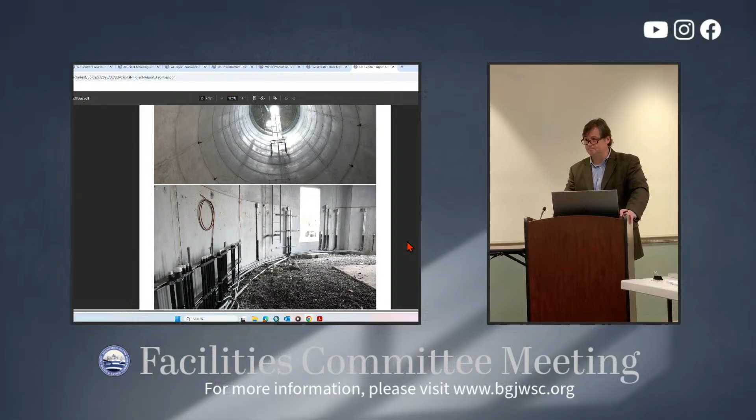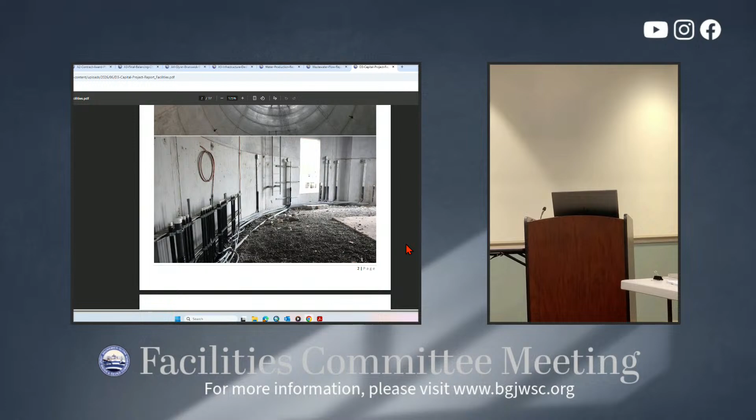Interior, we don't have a concrete slab the whole way in there? We will, yes, sir. Right now they've got their conduits, chases, and everything all plumbed out here. That's all ready to go. They will form a slab in the very bottom of this right here, so it'll be nice and finished when it's done.

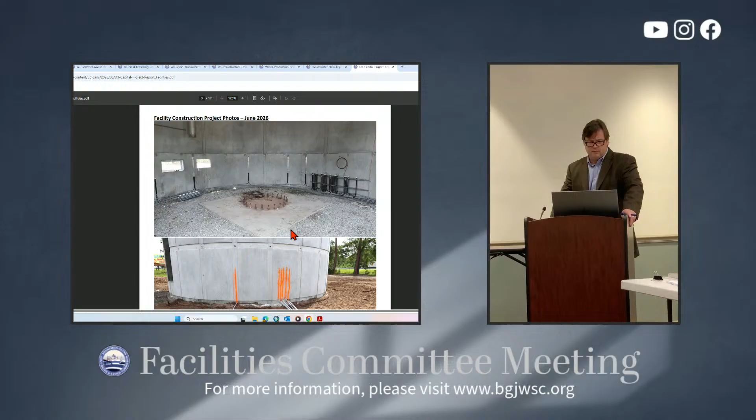You can see from that shot there - conduits, and that's actually a good bit of fill. This will be filled flush with the entranceway and the threshold, and on the outside of the tank as well, it'll be tapered down around the site.

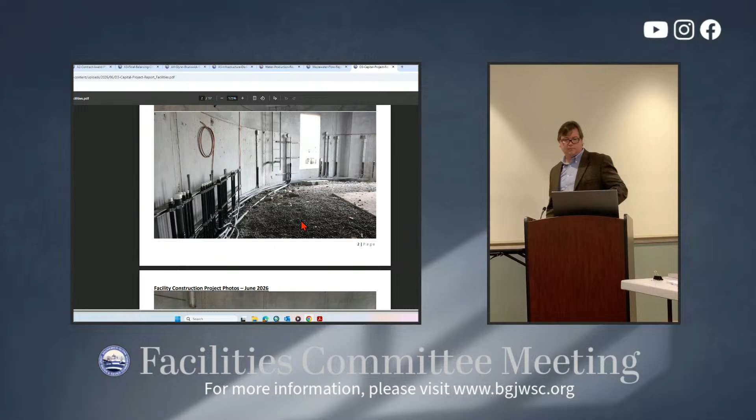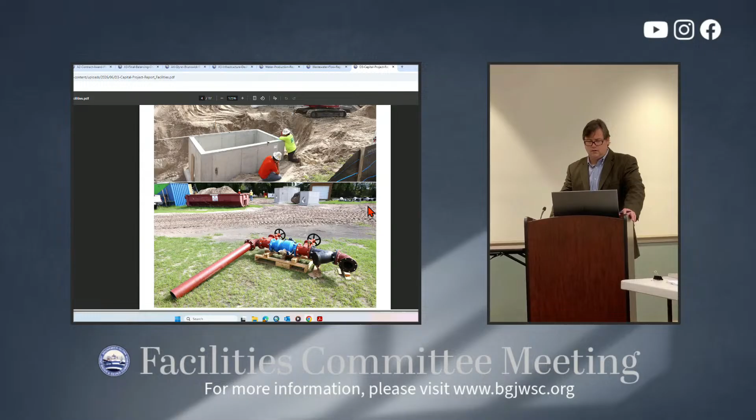Okay, next project is down at exit 29. Three-part project going on down there. The first, Division 1, is our water production facility or well site, but also the service pump house right there that sends the water out to our distribution system. And this is a vault going in here. Miscellaneous water main extension activity to tie in that new facility to the existing water system.

What's the vault for? That's our meter vault. Oh yeah, it's a meter vault.

So typically, water will come out - you can barely see it right here in the back corner, that's our well. We took an existing, pre-existing well, rehabbed it, modified the motor and such to the conditions that we need now. That well pumps over our ground storage tank over here. Then when the system calls for water to be pushed in, we pull water out of the ground storage tank, it comes in our high service pumps here, comes out here, goes through the flow meter, then on out to the system.

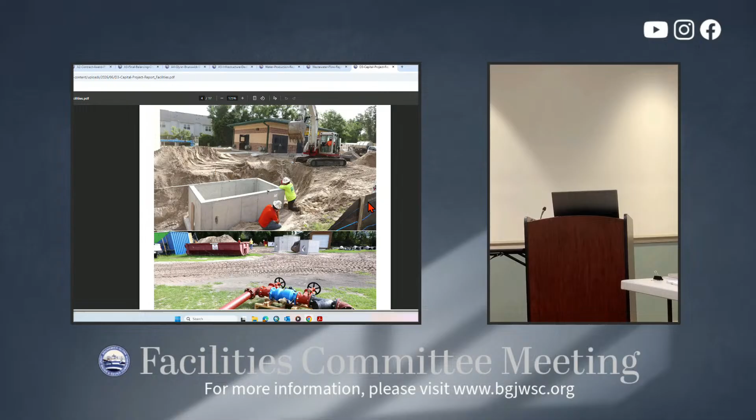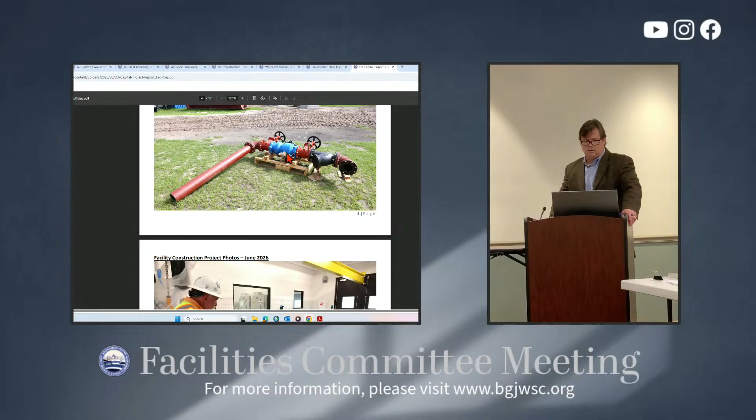There's our meter, what a typical meter looks like. When do you think we'll be turning this well on? Very soon, we're in the last throes of it - you can see the production facility is essentially complete. This is the last major item of the project, the water line tie-in, which they've been working on this week. Tie-in's supposed to be Thursday. Yeah, I'm supposed to finish that Thursday. I would say within a month we should be seeing water being pumped out into the system. Final closeout probably by the end of July.

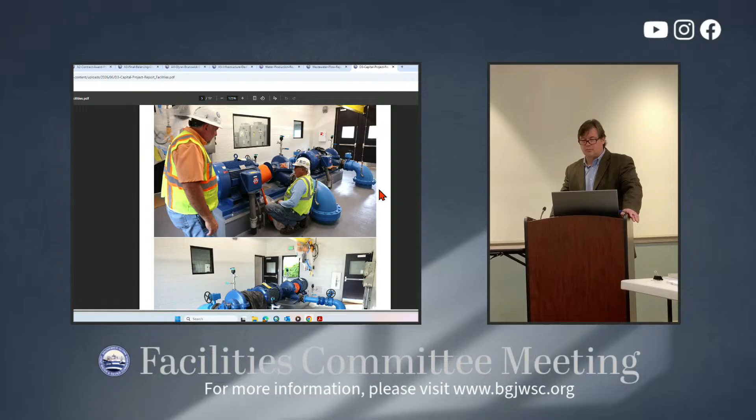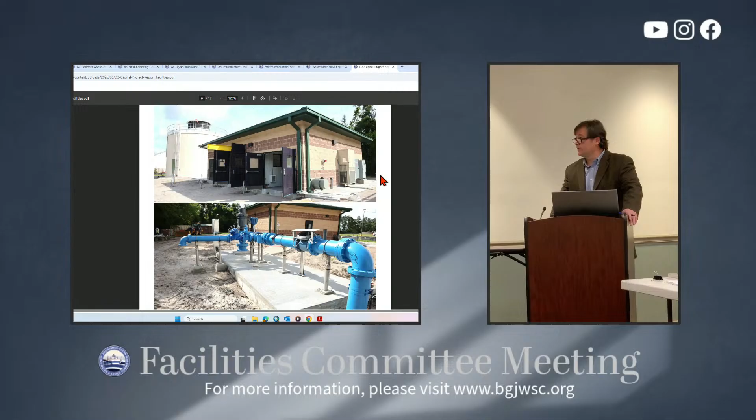Contractor's Petticoat Schmidt. Outside view of the facility is very nice, and it complements the existing exit 29 water pollution control facility down there.

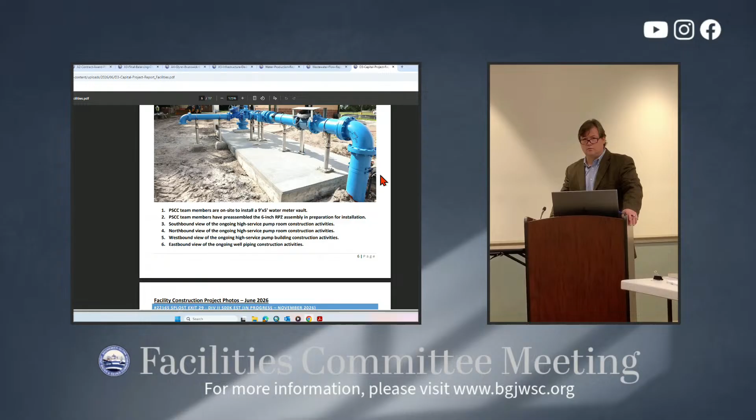Was anybody there when they raised the tank? At the treatment facility? Yeah. I'm sure we had staff there, it was during - two operators, yes sir. Video it? We do have a time-lapse video of it, yes sir, we can pull that up.

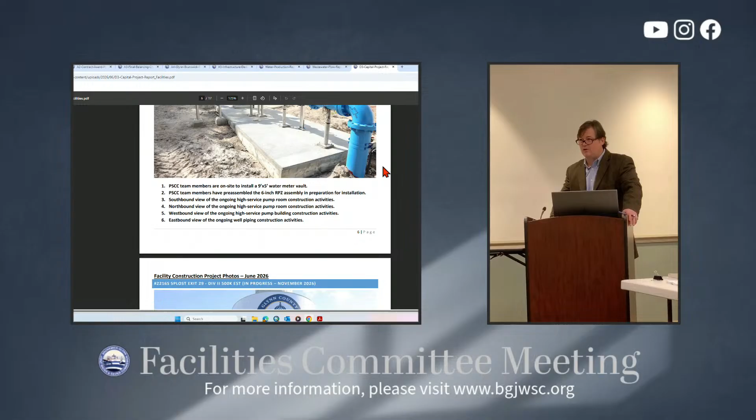Yeah, we raised that tank according to the video in about 8 seconds. Did it show how they raise it? Yeah, I think we can probably pause it and slow it down. We can talk about that, no problem.

So speaking of that, here is Division 2, our elevated storage tank down at exit 29, just south of the treatment plant on the commission's property. We had a very nice event down there. Glynn County staff and leadership attended as well, you can see them standing there.

As we talked about before, on these types of tanks they'll construct the concrete column first, and then build the steel tank, the bowl, around the base of it. They do that because it's easier to work closer to the ground, and they actually get it pretty much 90% painted.

Right now there's no top on the tank because it's threaded over the column, so it's like a big glass, or wine glass if you will. As it goes up, they'll raise that thing with hydraulics and cables, and raise it up into place. As soon as they get it to the very top, they weld it in place and seal weld everything, then build the top over the steel top.

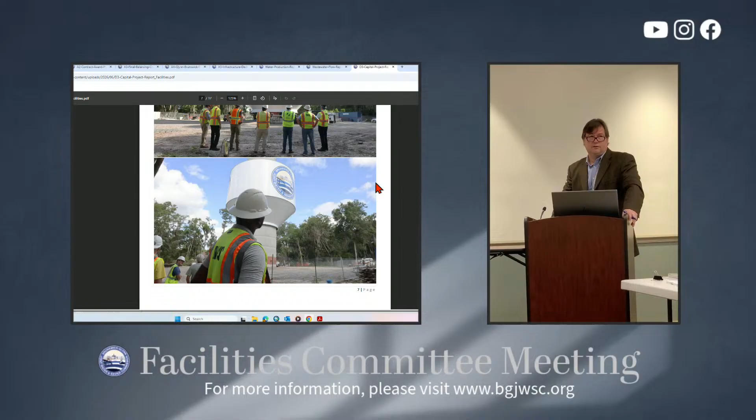They started a little after 8 o'clock, and by about 10:30 they had the thing in place. You can see it's moving about halfway up right there, and you can't really see the cables from this view.

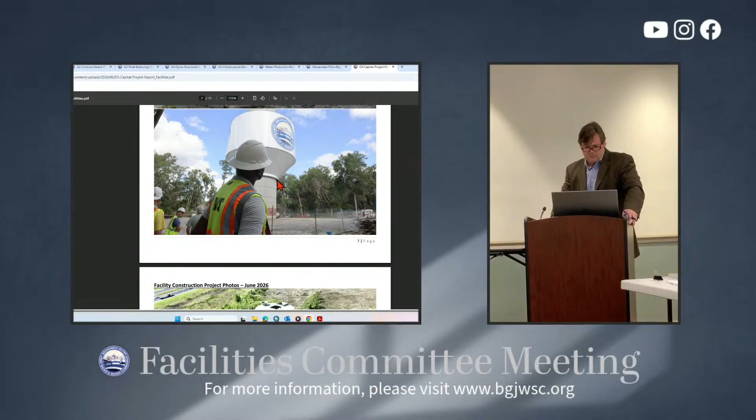But you can see right here, this kind of showcases it, all around they've got hydraulic cylinders, and cables suspended down, latched onto the bottom end of this bowl. It's all hydraulic rams, all coordinated. They raise them a little at a time, all the way around, to keep that thing level as it goes up. When they get to the extent of the hydraulic ram, they lock the cable down, lower the ram again, grab another bite, and pull it up some more. They do that multiple times, and raise that tank up to its top elevation.

There we go. Nobody's up there when they're doing that, or is it? Yes sir, their crew, crew members for them. I don't see anybody in that picture. They've got crew on top.

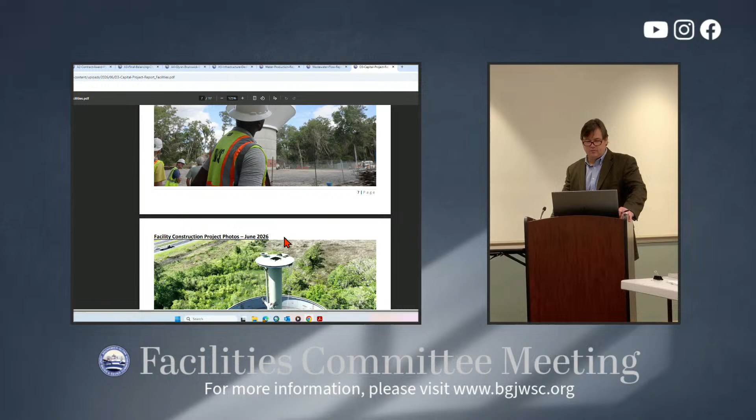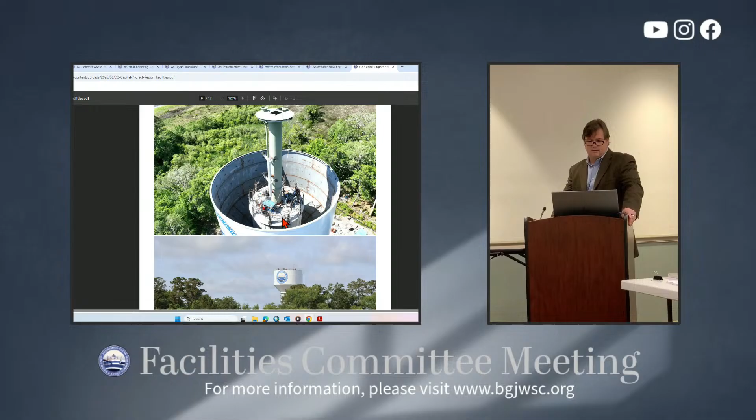And when are they gonna paint the inside? Inside's going on right now, matter of fact. So now they've got the bowl, or the tea glass or whatever you want to call it, already up in place, and now they start welding the top on.

You can see in these pictures here the corral they've got, and actually the top. Top's all welded into place, you've got the corral up top, some guys up there working right now painting all that, getting the outside done, kind of like drying in a house. Once that's all done, they start working on the inside.

The top has a little bit of a dome. Just a little bit, yes sir. Yes sir. Keep rain shed off of it.

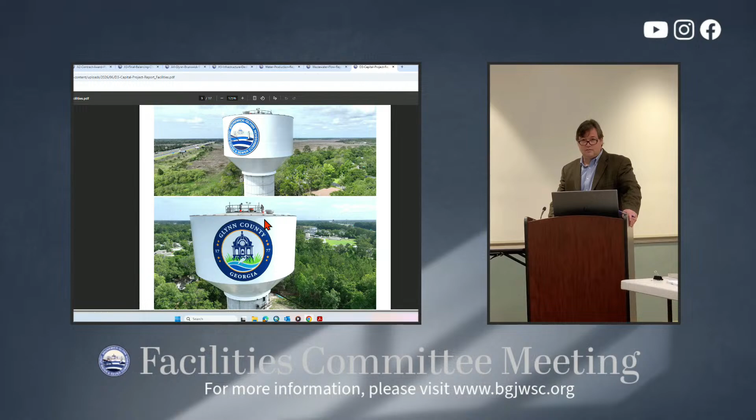Have you been up there? Not yet, they hadn't let us get up there yet. I'm not sure our workers' comp insurance wants them going in there, but we may get up there. May find a way, we may find a way.

Great view. All right, good deal.

Next project is Coffin Park pipe relocation. That is in progress, if you've driven by you've probably seen a lot of activity. That is a City of Brunswick project to rehabilitate the tidal ditch through there.

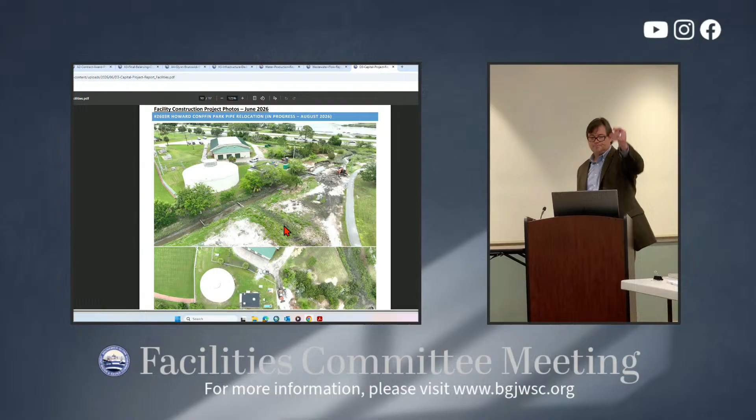It was a cooperative effort. You can see a couple pipe crossings that we have, and we teamed up with the city to work underneath their permit with the Department of Natural Resources to get those pipes basically under the ditch rather than having aerial crossings. Tidal action with salt water, the wet-dry cycle and all that is very hard on ductile iron casings, so it's better to get those underneath the ditch and out of the way. That way they also don't block up debris as it flows up and down the tidal ditch.

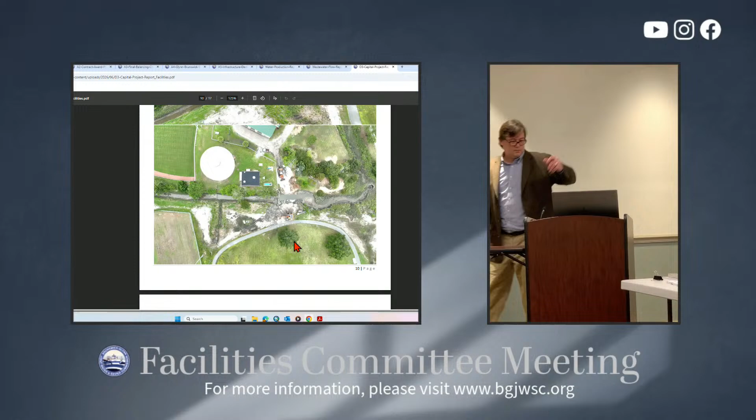Good aerial shot there, kind of a neat picture. It gives perspective, you can tell this one was dug, a straightened out ditch. Then you can see it kind of starts meandering here, gets a little more natural right here, crosses underneath 17 and on out to the marsh, or the ski basin, as some people used to call it, I think.

So they're straightening that out? No, sir, they're rehabilitating the walls. They're putting in an armor block, a concrete block tethered together with rope and whatnot, and they set that in there. The whole intent is to get it established with oysters and natural grasses that'll naturally establish and hold that bank steady. It's important to us because you can tell how close our facility is to the tidal ditch, and the corner of our fence is right here. There's been some overtime undermining and erosion that's happened, so that'll be fixed as part of the city's project, and that'll help protect our facility as well.

Is our production facility ever flooded? Yes. Now, that generator we installed out there is up in the air, so that shouldn't be a problem. Probably not the ideal location now for a facility like we have, slab on grade, but you can see this is essentially a salt pan. On super high tides, it does flood.

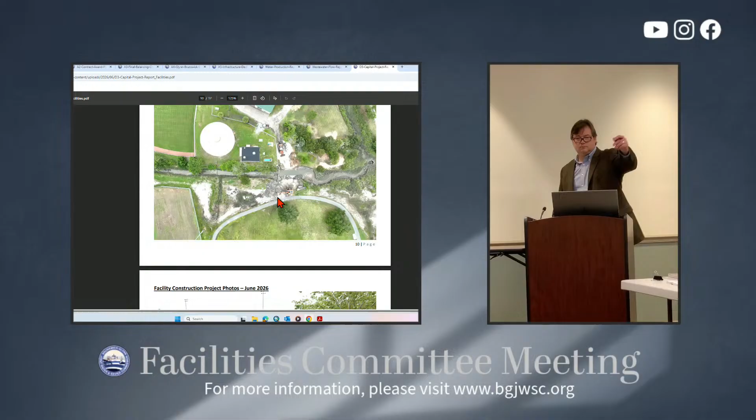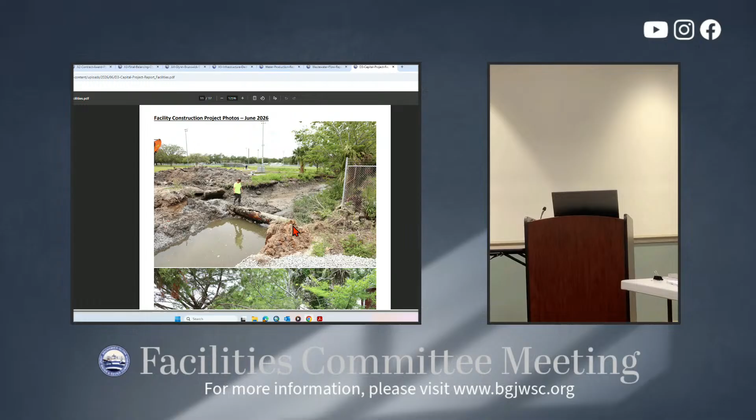Good shot there, you can see the casing. Again, this is a ductile iron casing with a carrier pipe or water pipe that goes out here to feed the water system south of here. But it's extended through its life, and it's corroded and actually compromised now. So that's part of the utility being replaced.

What type of material is the carrier pipe? Ductile. Well, the casing, yeah, I think the carrier's ductile too. Yeah, I know the casing's ductile, but I think the carrier's ductile.

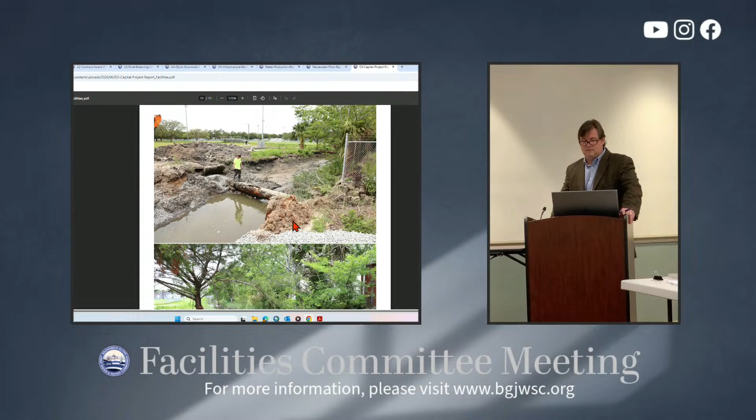A good view looking down there. One is the overflow from the tank. The other's looking down through here. The farthest one is actually a force main that we're going to reroute underneath completely, so we're going to eliminate all these crossings.

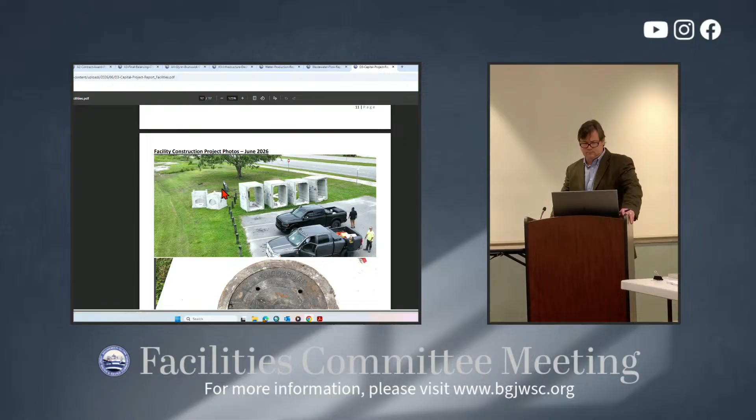Some of the city's precast structures arriving on site there. All those crossings are water lines? 3 water, 1 sewer. We're going to eliminate one of the crossings and just have 2 water, 1 sewer. 2 will be underneath, and we'll totally eliminate one of them.

The way we're doing that is getting a little creative with the configuration. We're not going to cross anymore here, we're going to come down and come across and tee it in and tie it in. So we'll have one major crossing through here, and we're able to eliminate the one.

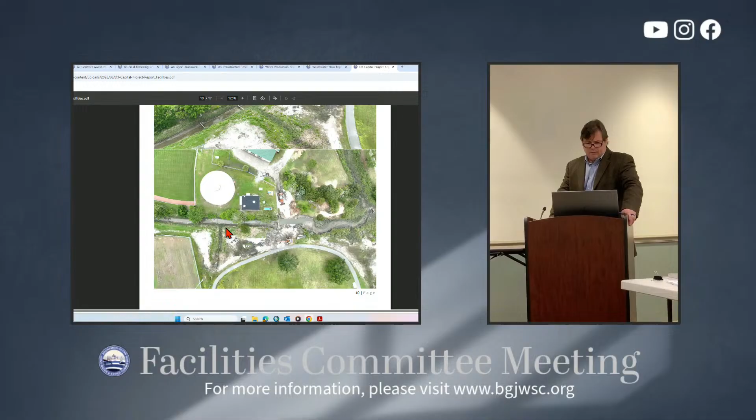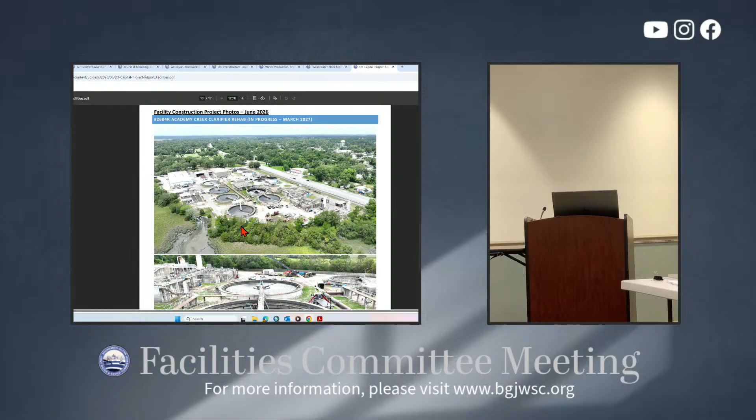Okay, next project, Academy Creek Clarifier Rehab. Yes, we are finalizing phase 1 services in the design build project. They've inspected the clarifiers, presented their first guaranteed maximum price, and we're taking advantage of the design build process. We've had a meeting with them and understood what the cost drivers were on the project. We've eliminated some things from the project to get it closer to the original budget. We're hoping to bring that to you at the July meeting for consideration, but we have ordered the clarifier mechanisms for the last meeting. That has been confirmed with the manufacturer, and we're looking forward to getting underway.

But this project is a great example of why the design build approach has been successful for us, because rather than just bidding out that we would like all these things done and getting the bid back, we were able to see what the cost drivers were in different areas and determine whether it was worth that amount of investment to get it done. So some things that would have been nice to have weren't necessarily worth the cost. We're waiting on the updated price, but we believe we'll be able to knock over $1 million off their original price by doing it this way. So significant savings for us.

But you can get a good look at the inside of the clarifier. Clarifier 2 was down. The old skimmer arm dropped and started scraping and rubbing, so we had to bring it down, fix it, and put it back online. That clarifier is going to be the first one that gets rehabbed.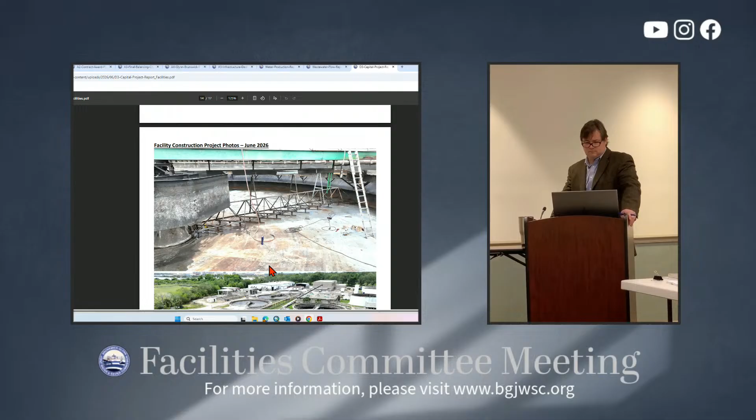It's a constant headache. What's the age of these? Looking at that overall aerial, can you tell us the oldest ones? Yes, go back up to that right there. The 2 to the east side, clarifiers 1 and 2, were put in original to the plant in the 50s and 60s. 3 and 4 were put in the 70s, and 5 and 6 were installed in the late 80s. Now 1 and 2 were rehabbed in the late 80s, but the other ones have not had any rehab. None of them have had any significant rehab since the late 80s.

Let's go back and look at that manhole cover. Yes, sir, you skipped that. I did, I should have taken time on that. Tell us what it says.

So, any drainage structures that drain to, or directly to, which is pretty much anything around here, a water body like our creeks, tidal creeks, et cetera. I believe it's part of the requirement to follow the coastal stormwater supplement. But anyway, it's to notify folks, hey, don't dump anything into this drain, or make people aware walking over the top of it that this goes straight to our streams. It's a stormwater thing, drainage.

So they're required to put that on now, sir? They're still required to put that on? The city has to put that, or they choose to put that on their storm drainage structures, correct? Yeah, first time I'd ever seen that. I've seen storm drain lids, but I've never seen 'drains to waterways.'

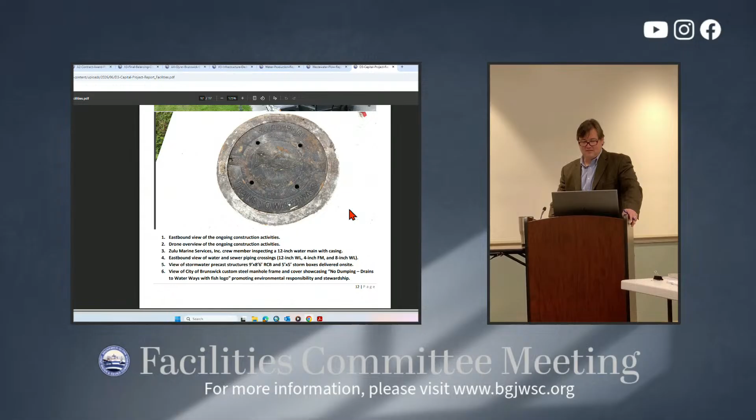And it's in converse to the subdivision where you just hit the storm drain because it doesn't go there, everything, right? It doesn't go there. If you can shove it in there, it's good, right? With grass clippings - hey, an HOA president, my neighbor's gonna go by one day, he's blowing all his clippings into the street into the storm drain, going like, hey dude, what are you doing? Get rid of them. Out of sight, out of mind - it's somebody else's problem, sir, we've got private storm drains out there, but don't do that.

But thank you for the question, that's a good observation to talk about. All right, so that's the majority of the pictures there, or at the end of the pictures.

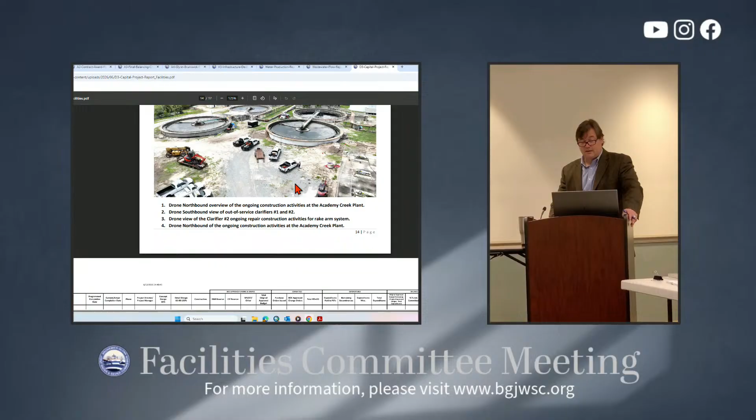We do have the spreadsheet, which has the detail of all our projects, whether under construction or not. Some of them designed, some pending design, et cetera. But happy to answer any other questions if there are any.

Are we gonna get a report on the smoke testing? That will be in July. We met with our smoke testing partners yesterday, got a draft presentation and report from them for us to review, with the goal to present that to the facilities committee meeting in the July timeframe. Very successful project, I think they got some great things to highlight. Looking forward to seeing the report presented and also presenting information on the improvements we've made since that has been undertaken. So McKim & Creed should be here at the July meeting. We had a meeting with them yesterday, they agreed to be here for that.

What's 2501 McKenzie, Prater extension? That was a water main extension of a section of new right-of-way out off of 341 by the new school and the subdivisions out there. So we installed new water main as a portion of the Glynn County project to loop that back to 341. That project is complete, it's going to be closed out as a COD. Trying to get water and sewer close to the Sterling intersection. We're working through that process.

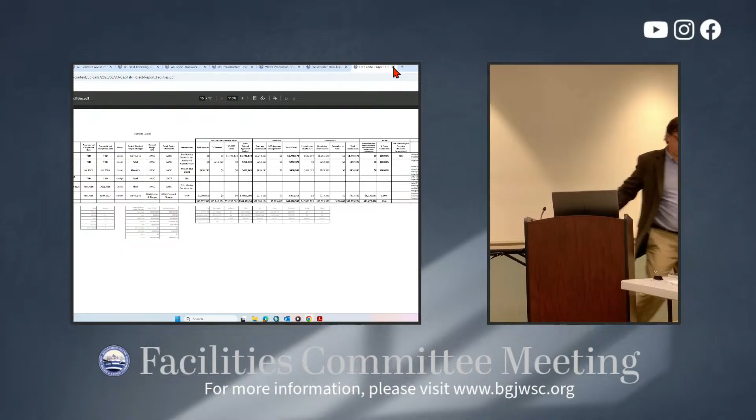Now we'll go to the approval section of the agenda. Minutes from the May 20th, 2026 Facilities Committee meeting. Can I have a motion to approve those minutes? Motion to approve. Second. Motion second, all in favor?

Motion carries 3-0. Item 2, contract award, pump station 3103/4119 rehab and force main phase 1 services.

Mr. Burke: as we were mentioning on the clarifier rehab project, going with this alternative delivery approach has been successful for us, and we desire to do that on this project. We actually have two separate funded projects. 3103 is in Royal Oak subdivision.

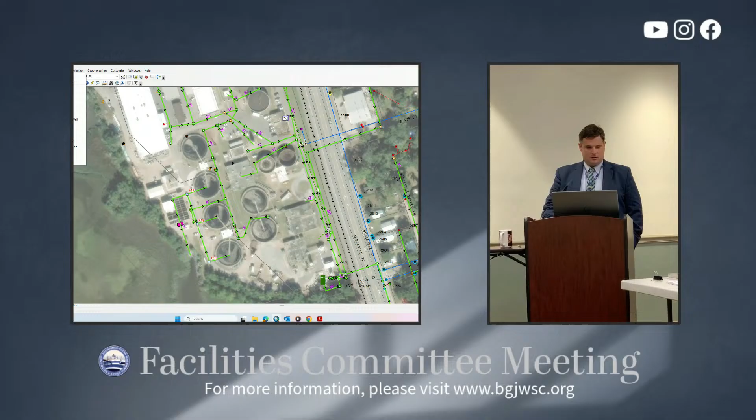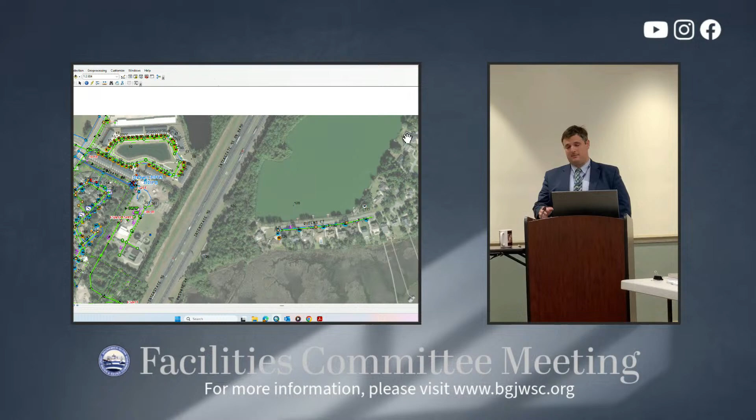At exit 29, the pump station receives flow from the commercial areas around the subdivision - the hotels, the restaurants, the gas stations, things like that. It also receives all the flow from the neighborhood and all the flow that is delivered from the port at exit 29 at Colonel's Island. So that station is in need of improved flow rates.

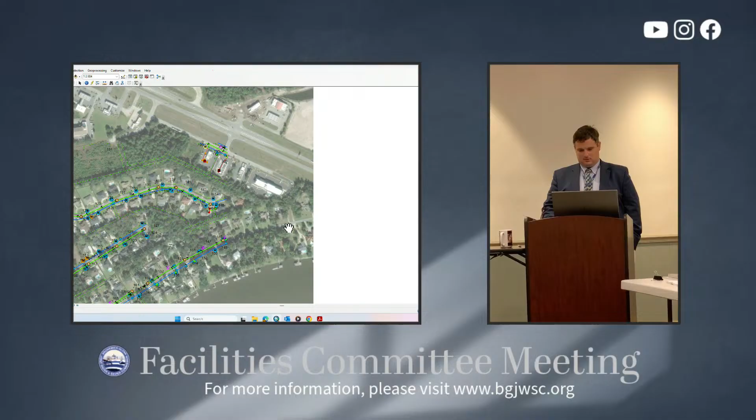Currently is... where's the station on here? I'm trying to get there, but it's not wanting to cooperate with me. I was told this was going to be faster. You wait till Danny gets back from out of the country.

Is it a duplex pump? It's a duplex pump station, sir. It's 400 gallons a minute right now. We're going to 650 gallons a minute based off of the way we calculate flows.

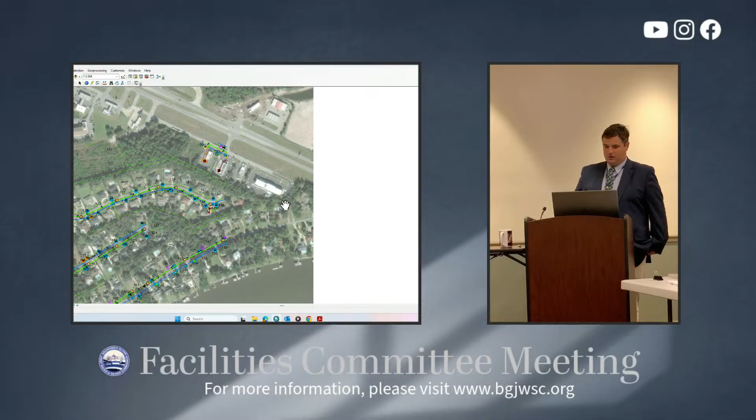That may require a new wet well, which is being considered at this moment. It's likely a situation where we have to, at the very least, install some sort of additional wet well capacity, maybe using an influent manhole to increase the well capacity.

So 3103 right here, Andy Tostensen Road, the Fancy Bluff Well Facility. This is the new hotel facility that has been constructed in the last year and a half or so. So all of this flow from the commercial areas on the east side of I-95 flows to the station.

Then again, like I mentioned, you see this green force main line here. That is the flow from the port. So this is to upsize the flow, but to upsize the flow, we also need to install a new force main through the area.

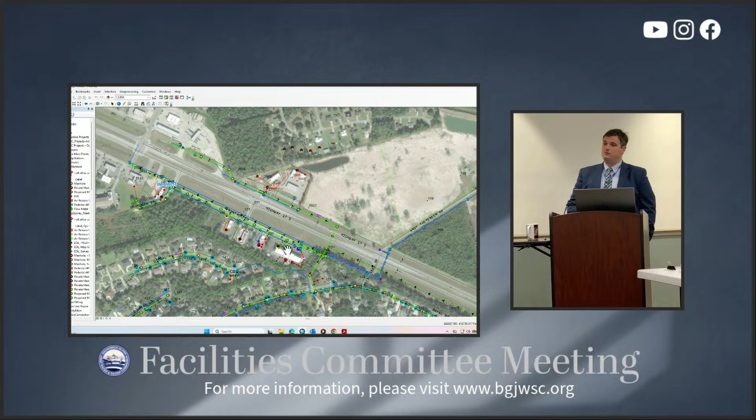The force main is limited on the velocities going in. The current force main comes down underneath I-95, going through a 6-inch force main inside an 8-inch casing, so we cannot reutilize the existing casing. So we're going to have to bore the interstate to put in a bigger casing and a bigger carrier pipe for that force main.

The goal is to reroute that off of the existing force main so that it can stay in service throughout the project, other than tie-ins, and actually go directly to the wastewater plant at exit 29 back through the neighborhood.

And so the second project, 4119, is at the intersection of Golden Isles Parkway and Highway 99. It is a major pump station in the North Mainland District.

It takes all of the flow up Golden Isles Parkway across 99 and all of the flow west or south of Golden Isles Parkway along Highway 99 until you reach Chancellor Road, which is the end of the system over there. So all of that flow comes through there.

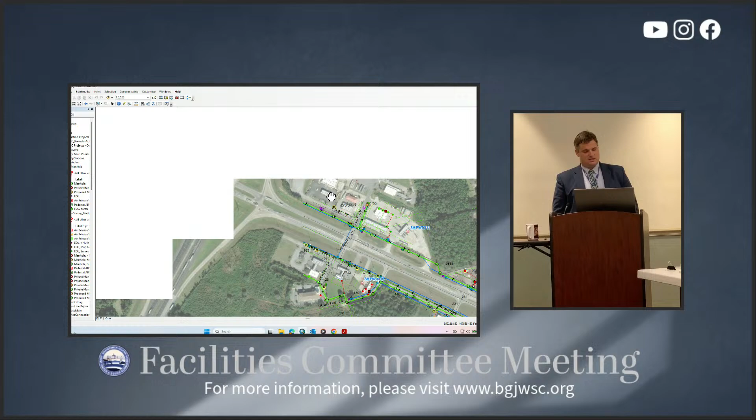And GIS is not cooperating with me. We may have to go to Google Maps. So,

Pump station is right here, off in the corner. If you know what it is, you know what it is, but otherwise you won't even notice it. That's it, right at Chancellor Road, you said?

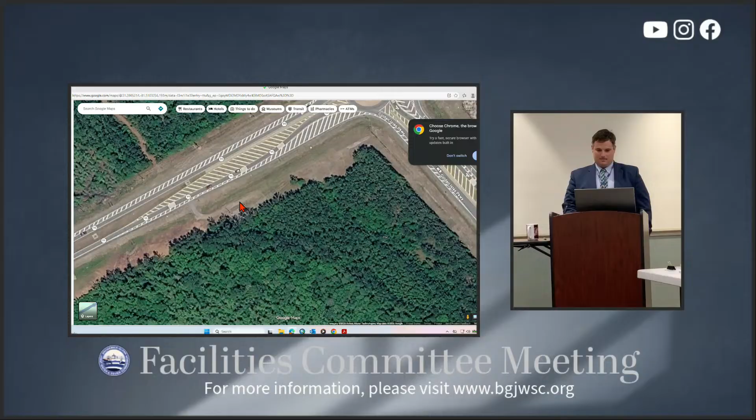This is at Golden Isles Parkway, the new roundabout at 99. This takes flow all the way from Chancellor Road, so Tanglewood, Autumnswood, out to the Chancellor Road area.

It also takes all of the flow from the neighborhoods up Golden Isles Parkway on both sides of the road, and will receive the flow from the new school facility that is being constructed at the north end of Golden Isles Parkway.

And it takes flow from these areas over here on the other side of the intersection as well. So that station has seen a significant increase in demand for flow based off of planned developments that have submitted capacity requests. We need to take that station from 800 gallons per minute to 1,950 gallons per minute. That is not the demand today, but that is the demand moving forward.

So we need to go to a 12-inch force main. Currently, the force main pumps alongside Highway 99 and dumps in right here at the new Amazon public right-of-way out there.

We mentioned Altama Plantation is about to extend a force main back through these easement areas and tie in over here on Shell Road. The new force main we will be installing will be manifolding into that new force main so that the flow from Highway 99 will pump directly to Shell Road and off of 4118.

So we have to install the section from this intersection back to the pump station, which is about 10,000 linear feet. So we put out an RFP for a design build proposal on this. We had the most well-attended pre-proposal meeting in the history of the Joint Water and Sewer Commission.

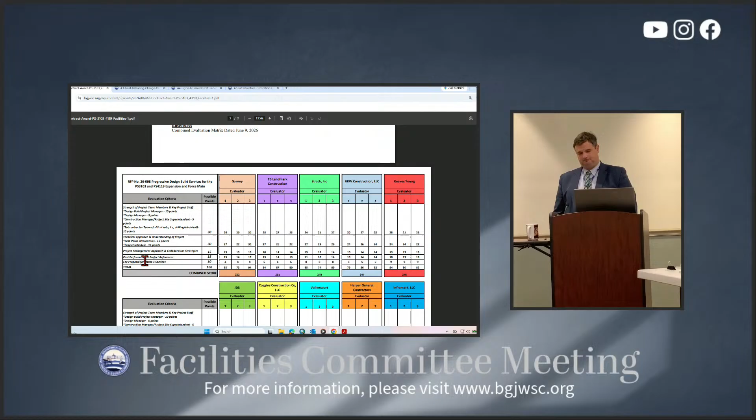So this is a fixed fee of $492,000? For Phase 1 services, yes sir. $492 for that, and then they will bring forth a guaranteed maximum price that we will present for consideration for award. As we mentioned on these projects, we are not required to move forward with Garney for Phase 2 services.

We will be provided with a 30% design package through the end of Phase 1 services. And if we can't come to an agreement on price, we could pick it up from that point and go elsewhere. So the $492,000 is for the design of the force mains? No, not all of it. It's just to get to 30% design, do investigation, things like that.

So the contractor and the engineer both get paid as a portion of Phase 1? It's because the contractor helps with routing and things like that. That makes a lot of sense.

So what's the time schedule for this? 120 days upon notice to proceed for getting us a guaranteed maximum price. So if we're awarded tomorrow and contracts start, we're probably looking at early August before we kick this off. So you're looking at end of the year before we get a guaranteed maximum price. And 120 days is when they deliver that to staff. Staff then takes the opportunity to review and see where we might want to go from there. So for the board, maybe January or February before we see a guaranteed maximum price presented to the board.

This is not going to affect the development up there, though, is it? No sir. The Altama Plantation Development is putting that force main in to give them sufficient capacity through the first few phases of their project, and we'll just be tying on to this. This will not impact their development.

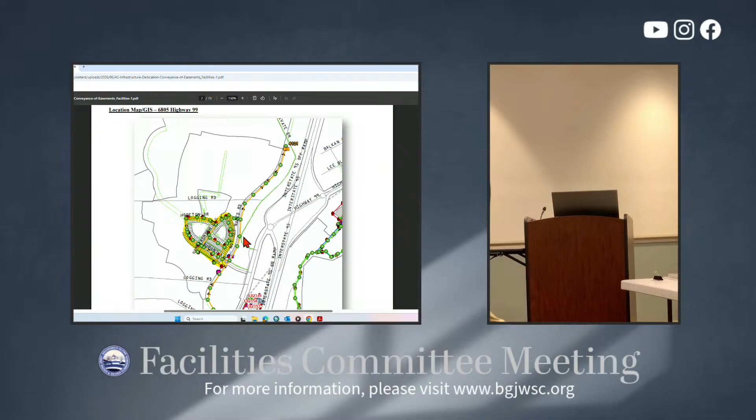Where's our plant site? Far north, not on that map right there. Let's see if I can find it. Still not jiving with us here, is it, for some reason?

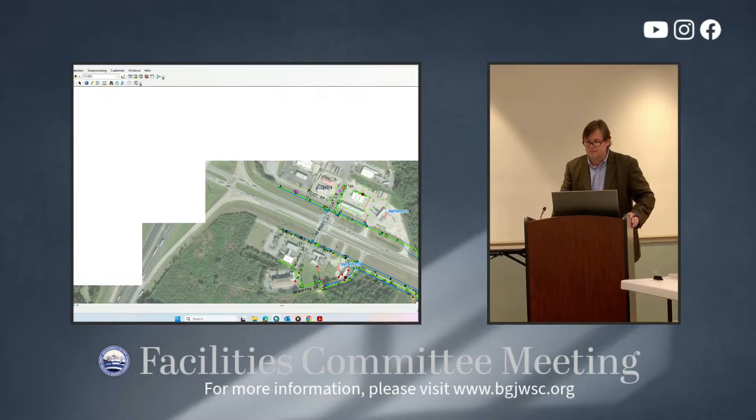So how many lots are in this? First phase is 159. And how many total lots do we have? Almost 2,000 total residential lots, I believe.

They do it in phases so they can plat those lots, get them building, and then do the next phase. We don't typically have as many phases as this project would have given the size of the development, but this is very much a standard procedure for performing these developments.

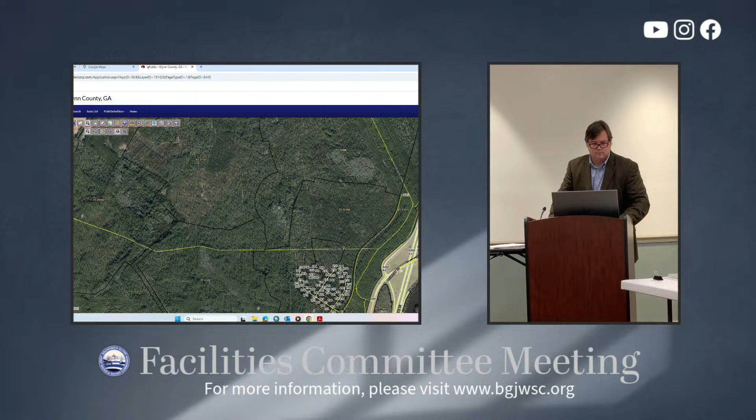Since our GIS is acting up a little bit, the deal you had first would look pretty good. It's just at the bottom of that picture, the second picture we're looking at now. Yeah, so it's at the lower right corner.

Now, the county has to approve the roads, right? Correct. So as part of the plat, the county accepts the roadways as public right of way, within here, and then also the entrance roads and everything else. And that's already been completed, correct? I think it's coming Thursday night.

Is this the main entrance into the whole development, or is there another future entrance? Correct. So again, we'll utilize qPublic here to get an idea. Main entrance is coming here, DuPont, coming in, major traffic circle. Phase 1 is into here, phase 2 will be beyond.

Along this area through here will be the commercial and possibly multifamily. And as Mr. Burrow said, the plant site.

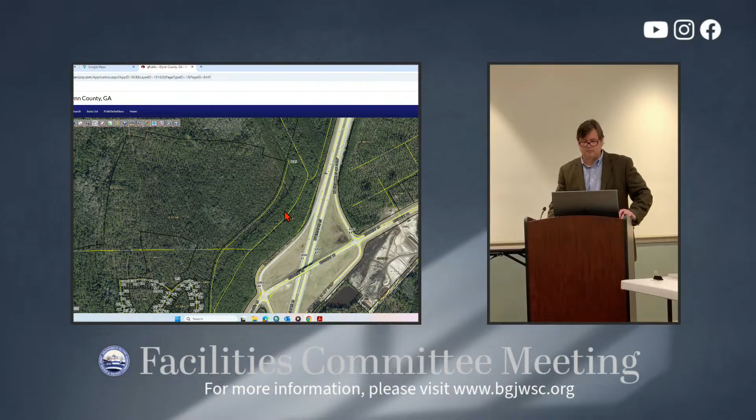Zoom out a little bit more. So this is the main entrance in for the entire development? Correct, it's the first one. Phase 1 is the first one you come to as you reach the traffic circle.

So when we're accessing our plant, we'll come to this entrance? That's correct, and go down that main road, right through the entire development. With sludge trucks, and everything else? Yes, sir.

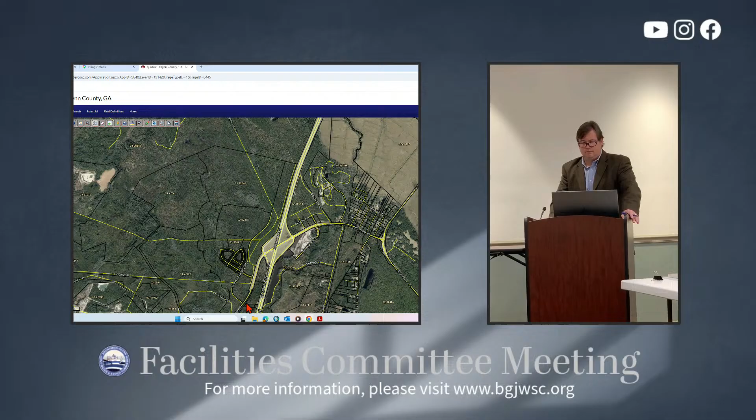We won't be within the residential areas. It'll be on the outside, the larger traveling road, the boulevard, I'll call it. The commercial will be behind it, between the commercial and the residential. If I jump back to here, this is more like a major commercial boulevard style roadway through here.

All the commercial will be accessed from that, so we don't have any more curb cuts needed. Is that road in all the way to the pump station now? It is.

And that's part of the infrastructure development we're talking about here. Phase 1 pretty much goes up to the traffic circle, so this is accepted. Right now, they've got the force mains in? Yes sir, force main is in back to 99, and they're fixing to start the force main to go under 99 and tie to that manifold at 4118.

It would televise the lines and all? Yes sir, yes sir, thank you for asking. At this point we have done all the testing, the inspections all the way through construction, testing, televising. Want to thank Ford again and their contractor Valancourt, who worked very diligently with us through the punch list items. A lot of work between staff, operations, PNC, everybody getting that done.

So everything's Valancourt been - was the contractor? Valancourt was the contractor. Correct. Good.

All right, so there's the dedication sheets in there if there's any questions on the footages of the water lines and sewer lines, and there is the pump station there. A couple easements to facilitate everything in here for us, and then there is that warranty deed I mentioned. We have to do the warranty deed, so the Joint Water Commission does own the parcel.

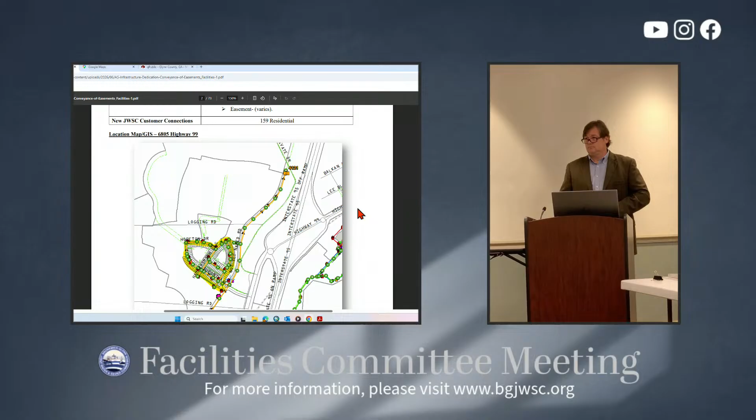Chairman, I move that the Facilities Committee recommend the full commission accept this infrastructure with associated easements as applicable. Second. Motion second. Any questions? Hearing none, all in favor? Motion carries. Thank you.

Chairman, I believe Mr. Munn wanted to speak to the board. Okay.

Good morning, gentlemen. Good morning. I'm Chuck Munn, I'm Director of Development for Hoyer Investment Company. We are really excited to see this first phase be at a point of turnover.

It's taken a while to get there because there's a lot of infrastructure that's gone into it outside of just what is in the residential area. Working with Andrew and Todd and their entire team here, we've had a great working relationship. The contractor we brought in, Valancourt, we think has done an exceptional job. We'll be with you for probably the next 10 to 15 years completing this project.

Right now, a lot of people ask when is commercial going to start. Well, we really need some rooftops out there first. We look at that 150 acres as not just typical interstate commercial. We have roughly 2,000 rooftops of residential that will be behind that, and we know there'll be other residential in that northeast area coming, so we'd also utilize a component of neighborhood commercial to look at things like a grocery store that might serve the residential, cutting down on the amount of traffic in the area.